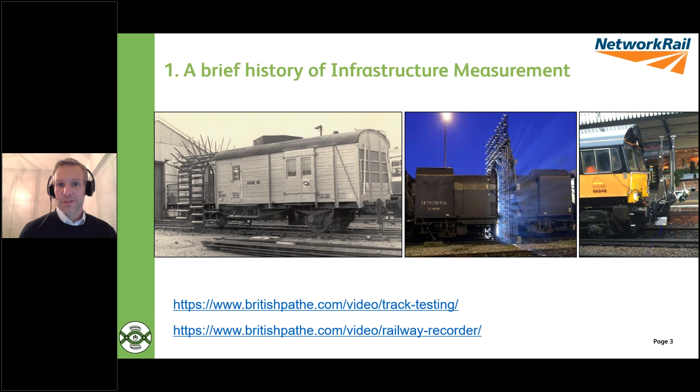So my experience, as Andy said, started in the rail industry in September 2000, and shortly after that, something unfortunate happened that obviously changed the way that we maintain and measure our infrastructure. It's the accident at Hatfield, 17th of October 2000. Unfortunately, 4 people lost their lives. A rail break caused a high-speed train to derail at, I think, more than 100 miles an hour.

Rolling contact fatigue was identified as the cause of the rail break. So effectively, surface cracking in the rail being left untreated and propagating down into the head of the rail, and as you can see by the picture, caused the rail to shatter into loads of pieces. And as I mentioned, 4 people lost their lives in that accident. That was very early on in my career, 6 weeks in.

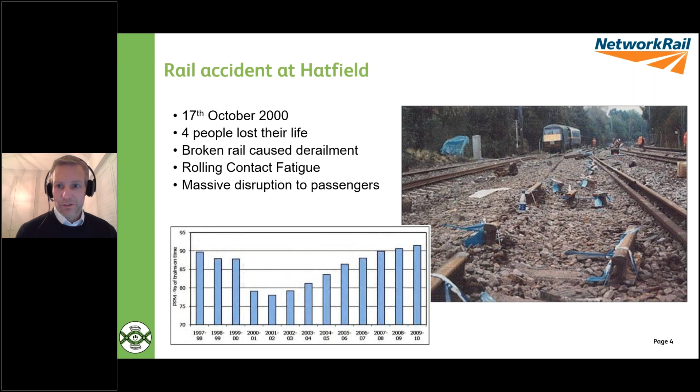There was massive disruption to passengers, as the graph there shows, PPM down to 75, 76%, huge disruptions, huge delays. And what I'm going to talk about in the next few slides is really as a result of this. There was huge investment in infrastructure measurement, both technology and trains, and I'm going to describe some of that.

So the first thing that came out of that was a real look at our rail testing and rail management regime, with the introduction of the ultrasonic test units, which, as I'm sure most of you are aware, run around our network using ultrasonic probes to test our rails, to identify internal defects within the rail.

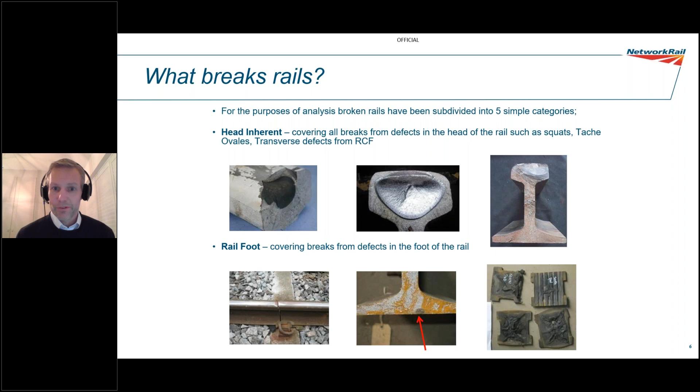Just as a bit of an overview of some of the types of defects that these systems detect, broadly broken down into 5 different categories. So head defects, which is sort of the images on the top, rail foot defects, which are proving to be difficult to find, and as you'll see a bit later, making up a larger and larger proportion of the number of rail breaks that we have per year now. Also weld defects, so faulty welds, again, the numbers here have reduced drastically, and there's also bolt hole breaks from star cracks at bolted joints.

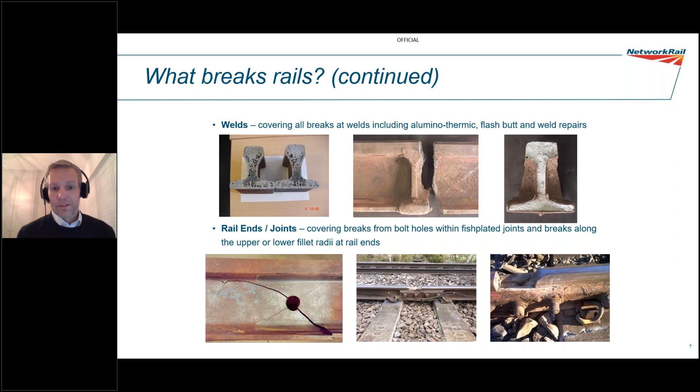I guess the other thing to consider is the backdrop of that is that over that time period, traffic has probably gone up by around 50%, and access to the railway to actually perform maintenance has reduced drastically, so much less access to actually get in and intervene. So obviously the UTUs were not entirely responsible for all of that improvement, but they were a very large part of that. So obviously some good coming of the catastrophic events at Hatfield.

I mentioned earlier about different types of defects. So just a bit of an analysis here around the types of defects that were prevalent in 2010, 2011, which is the pie chart at the top. So 30% weld defects, 16% rail ends, 40% rail foot. 5 or 6 years later, weld defects halved, rail end defects halved as well in terms of percentages, and rail foot defects making up a much greater percentage of the total number of breaks.

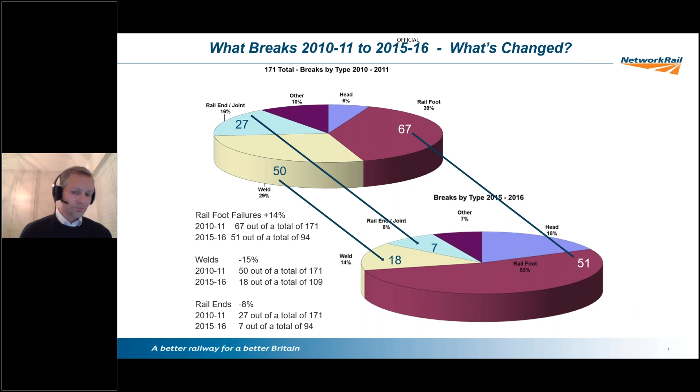In addition, so I joined Network Rail in 2006, and there was a huge amount of investment going on in the measurement train fleet at that point. So as well as the ultrasonic test trains measuring the rails, there was also rail profile equipment fitted so that we can measure side wear, head wear. There's ground penetrating radar fitted. That was one of the first projects I worked on at Network Rail, bringing that technology in. I'm just going to say a little bit more about that.

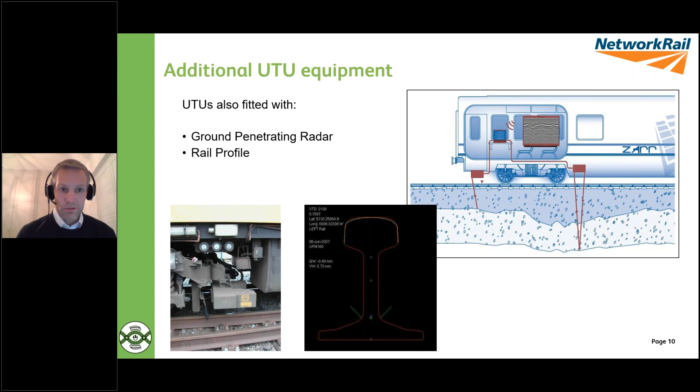So yeah, we fit the first batch of GPR equipment in 2006, trying to understand track bed condition, trying to understand whether we could identify the early onset of wet beds, whether we could do more to determine where renewals were required versus where maintenance would work. And these pictures on the slide here just show the GPR antenna fitted onto the measurement trains. It's the black box that you can see there, hopefully that's popping up on the screen, and the white box on the image on the right that houses the antenna.

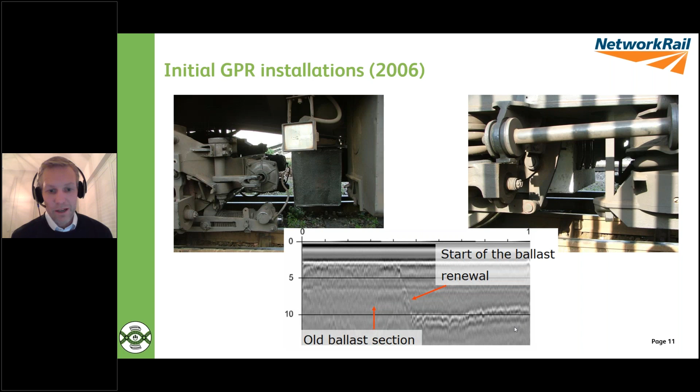So this was quite a useful introduction, and in fact so useful that in 2009 we actually upgraded the equipment. So we fitted some effectively higher resolution antenna, 2 gigahertz antennas, so that we could really get a detailed look at the ballast condition itself, and look at the fouling levels within the ballast.

So Andy mentioned new measurement train. I worked on the geometry system that was fitted to that vehicle whilst I was at AEA and tested it. Came into service in 2003. And yeah, it's still, almost 20 years on, still the flagship of the measurement fleet. Probably could do with a new name, not so new anymore. But yeah, it's running around our mainline track.

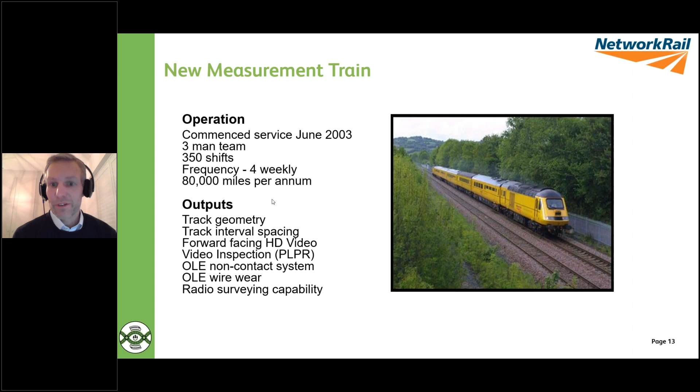It's recording track geometry. It's recording track intervals, separation between tracks. It's got plain line pattern recognition, video inspection equipment fitted to it, high definition cameras, and there's also overhead line equipment fitted, so non-contact overhead line measuring wire heights and staggers, and also wire wear. So it's a bit of a Swiss Army knife of measurement trains. I think the only thing it doesn't do is the ultrasonic testing, and that's just due to the fact that the equipment doesn't operate at the speed that this train runs at.

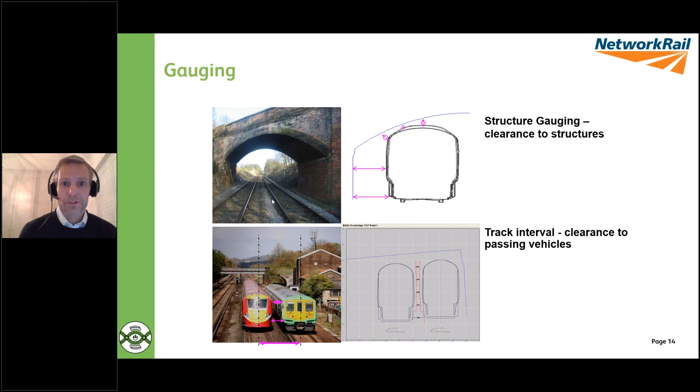I've mentioned gauging a few times, so it's kind of a key thing that the fleet does. So making sure that vehicles fit through the sort of structures that are around our network, and also making sure that they can pass each other safely. So tracks are far enough apart from each other. Again, this is another area that I've worked in quite extensively over the years.

So this is the black optical car on the first slide as I started. This again was a project that I started working on soon after joining Network Rail, basically to move away from the white light measurement system, which had, as well as the high temperature that the lights caused within the actual vehicle, some reliability issues. There were some data accuracy issues. So this was our first step into using lasers for structure gauging. So we fitted the laser flex system.

Basically, it very quickly became known as the dustbin that was fitted to the vehicle. So it had a similar principle to the white light system that I mentioned. So it's shining laser lights out perpendicular to the track, and cameras looking back towards those laser lights to establish how far away from the system the structures were. And just a picture there showing the red laser lights coming out of the system when we were doing some testing.

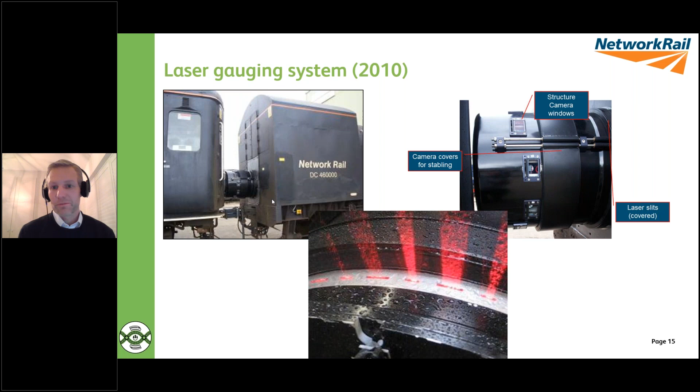Finally, I think in this section is Mentor. So Mentor is the oldest measurement train in our fleet. I think it's 60-something years old now, and it's overhead line measurement. It's a contact system, so it has an instrumented pantograph fitted to it that measures the force between the wire and the pantograph. It also measures the dynamic height and stagger of the wire, and also the acceleration. So it's giving you all the information you need to understand what the pantographs on passenger trains are experiencing as they're traveling around our network.

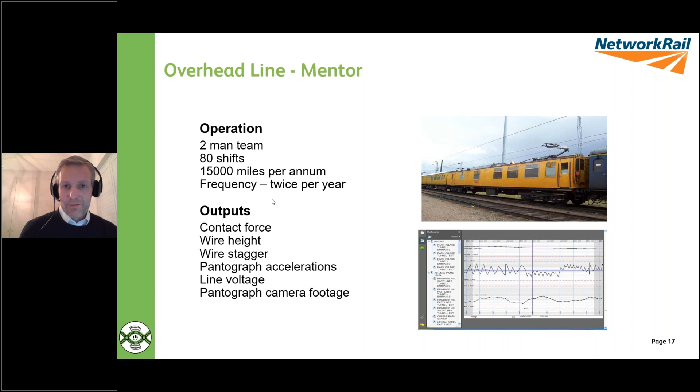It's limited to 100 miles an hour, so a bit more on why that's an issue for us later on. But we've recently upgraded the equipment on the train. There's another story about infrastructure measurement. The picture here on the left is the previous instrumented pantograph that was fitted to Mentor. It was unfortunately involved in a dewirement in August 2012. So we'd just had a new system fitted.

We were just commissioning it, just getting it into working order, and it came along and went through a section of track that had recently been maintained. The registration arm had been left in the wrong position. Mentor came through, hit the registration arm, massive flashover, bent the pantograph arm into the shape you see there, and fried all the measurement equipment. So that was a particular own goal for us.

But pleased to say that the picture on the right is now Mentor reinstated. That was taken at Old Dalby, testing that was carried out at the back end of 2019 to commission the new system, and it's now out and about collecting force and acceleration, heights and stagger data. So we managed to rescue that, thankfully.

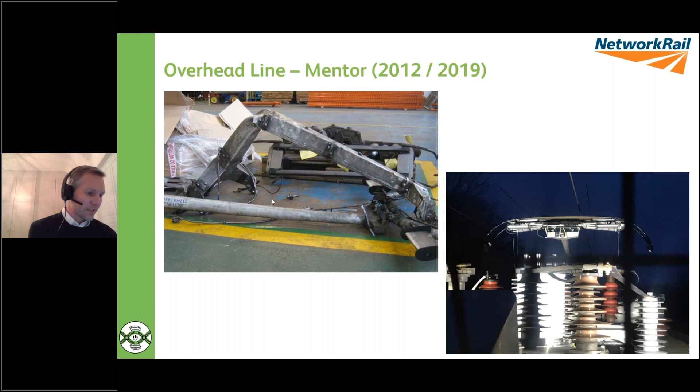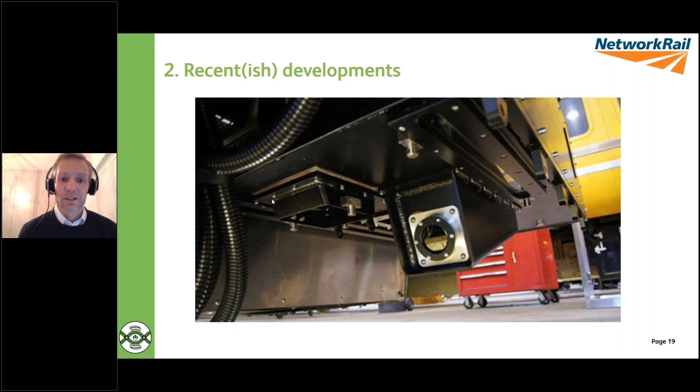So I'm going to cover some of the more recent developments in this area. I say recent-ish. Some of them not that recent, but they've still made quite a fundamental change to our measurement fleet and the way it operates. The main change since probably 2010 has been the introduction of plain line pattern recognition, which I'm sure most of you have heard about and probably know a bit about.

Effectively, it's a video inspection system. It's targeted at reducing the amount of visual inspection that's required of the track. Obviously huge safety benefits, and it also gives the ability to look at trends and how things are changing over time. So rather than it being a one-off inspection, you can look at faults over time and the numbers and how they're changing.

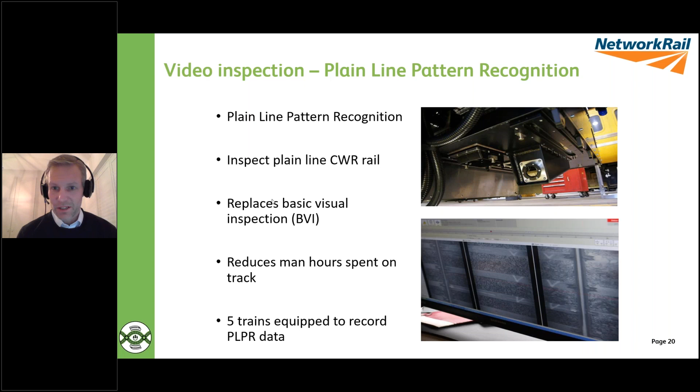It's based on a line scan camera system. As the picture shows here, there are 7 cameras fitted underneath the train, 3 looking at each rail and 1 looking at the four-foot. There are also laser scanners to build up 3D pictures and 3D representations of key areas, particularly around the fasteners.

There are also ballast shoulder lasers that are there to detect ballast shoulder levels and also the level of the ballast within the crib, so that they can be reported if there's insufficient ballast and potentially a buckling risk. And, although from a separate system, track geometry information is a key feed into the PLPR collection process.

So as I say, this is a measurement train borne system. In addition to NMT, there are 4 other vehicles, and they operate on a 4-weekly cycle around the plain line sections of the network. The process is that the data is collected on the trains. The on-train technicians ensure that the data is collected and recorded onto removable hard drives.

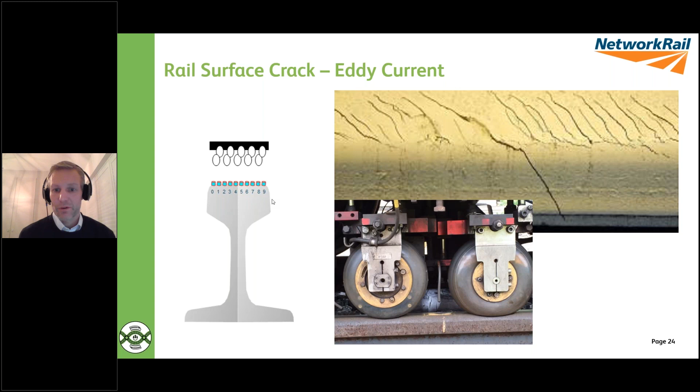So this next slide, which I've stolen from Brian, is just a very simple description as to how the equipment works. There's a coil which has a current passed through it, which induces an eddy current in the surface of the metal. And then if there's any flaw or crack within the rail surface, that will affect the eddy current, and the effect can be measured. So if I just get back to the previous slide, there's 10 probes across the head of the rail. So each one of those probes is effectively doing this and identifying within its sphere of measurement whether there's anything that's affecting the eddy current.

I think the big step forward with train-borne eddy current testing compared to the previous manual process is that the output is the depth. So it's the depth of the cracking, whereas the manual process was measuring the longest crack within a given section of rail. So it's really the depth that you're interested in to give you the risk of an internal defect developing.

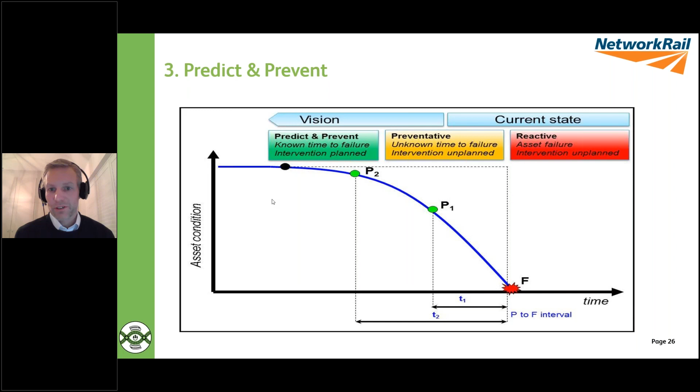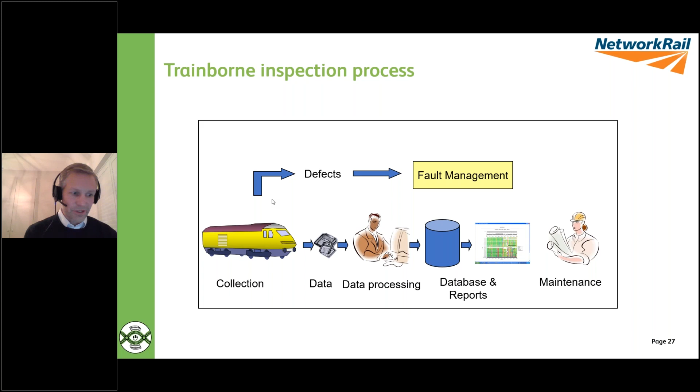So when I move on to intelligent infrastructure, there's more of a description on how we're trying to get away from that, how we're trying to do things more intelligently. I think the main point of this slide though really is that it's still quite reactive in terms of the process that it drives. And reactive maintenance is a problem for us really, because it's quite inefficient. Our access is reduced hugely, so being able to work in a reactive way is difficult.

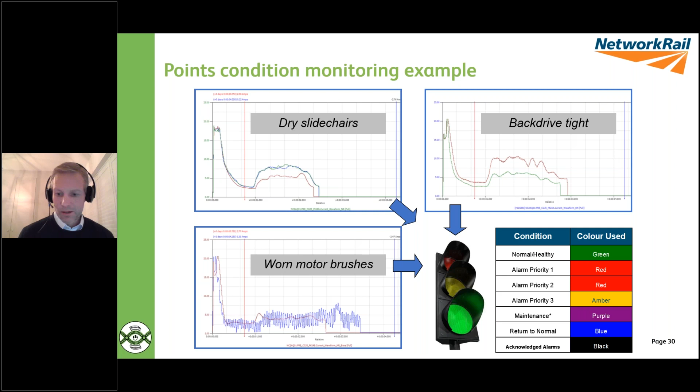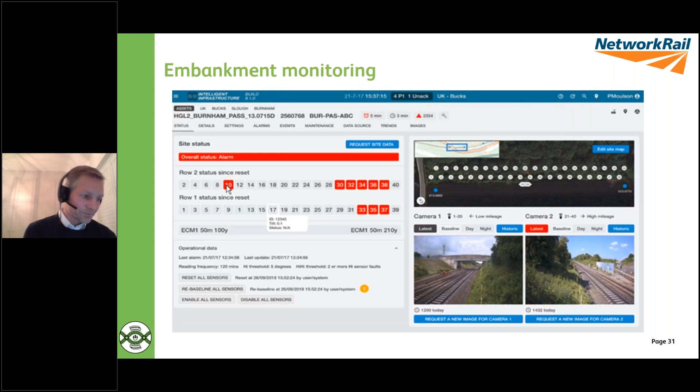That's something that's been a long time in coming. It's something that will definitely help with the more monitoring approach to linear assets that's been adopted with the embedded monitoring program. So more regular data, looking at trends, looking at changes over time, and predicting when it is you need to go and intervene.

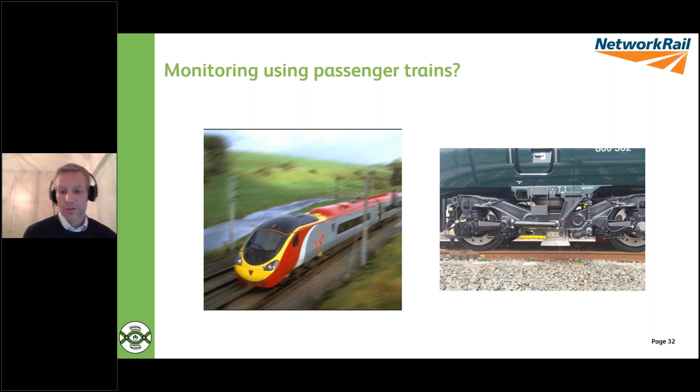So we're in the process of selectively deploying overhead line equipment onto passenger trains. One on West Coast Main Line, Great Western Main Line, East Coast Main Line, and also talking about East Midlands. So that's going to be more regular data, again, predictive. It opens the door to predictive capabilities that we can develop, which brings me neatly on to the Intelligent Infrastructure Program and our plans for exploiting all of the data that we're collecting.

And apologies for the change in the transition there between the slides. I just ran out of time to go through and change the formatting of slides and the transition points. But I thought the other way of looking at it was at least it shows that these aren't my slides, so a bit of a reminder to credit the Intelligent Infrastructure for these slides.

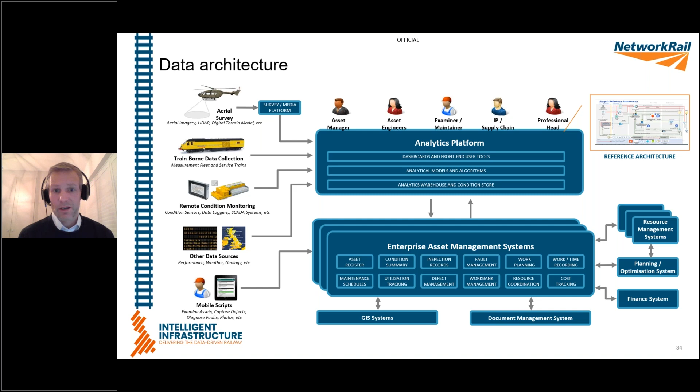And the next slide is a similarly high-level view on an end-to-end process for collecting data, validating it, mapping it, comparing run on run, so that we can look for changes, bringing it together with the relevant data that are useful to give an overall picture as to how the asset's performing, when the treatment might be required and what treatment might be the best treatment.

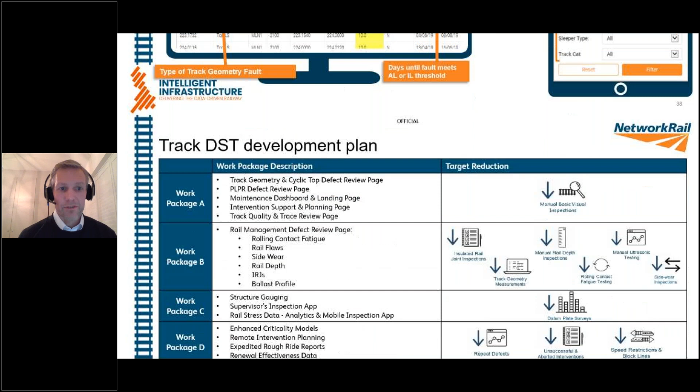So that's just for track geometry, but the plans are to build similar capability looking at rolling contact fatigue, or eddy current surface cracks, rail flaws from the ultrasonic systems, rail wear from rail profile, rail depth, ballast information from GPR. All of the data streams that I've mentioned already in the presentation are going down that route with decision support tools, predicted rates of deterioration, and looking to use that to become less reactive.

I think one other thing just worth quickly touching on is criticality of the system, the railway system. So trying to understand what the impact on the timetable is. So it's not just this piece of railway is predicted to fail soonest, so let's go out and fix it. If that particular piece of railway has one train a day versus another piece of track that has 100 trains a day, you need to be going to the right place.

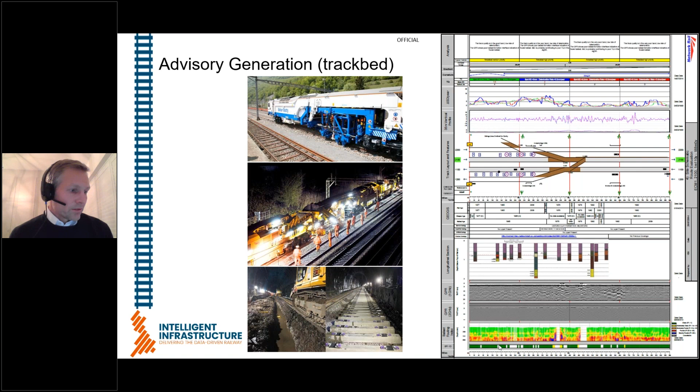So I'm just going to finish off by quickly going through some of the R&D priorities. In CP6 there's a huge R&D portfolio within Network Rail. It's been restructured slightly, looking across different sectors, different priority areas. So ease of use for passengers, emissions, optimized train operations. Probably the main two that I get involved with are reliable and easy to maintain, and data enabled, with data enabled being the thing I get most involved with.

So I'm just going to touch on a few of the projects that are going on within the area of infrastructure measurement. Within track maintenance and plant, there's a whole load of initiatives to do with components, future S&C, future track, cast crossings. But there's also a lot to do with monitoring. So there's robotic inspection and maintenance vehicles, a piece of work looking at whether we can build a rail test vehicle and also a vehicle that can do a weld repair of squats.

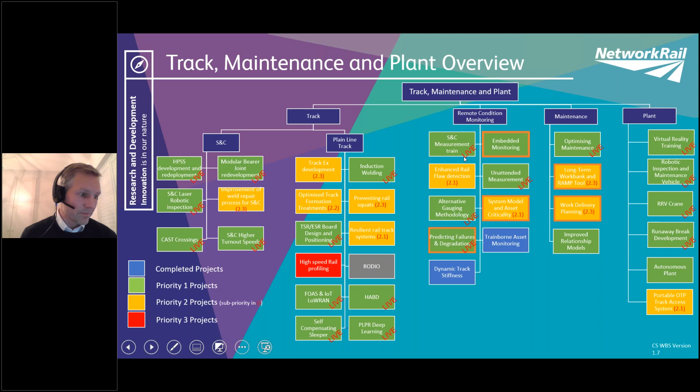So that's probably a couple of orders of magnitude better than the location systems we're using at the moment. So that could be potentially a game changer in terms of bringing together the different data sets more easily, rather than having to do a whole load of processing on that.

There's S&C inspection, so both from a robotic point of view, a piece of work looking at measuring the profile, measuring the clearances, contact angles and things like that, using the Felix robotics solution. And there's also a piece of work that's just started where we're looking at a kind of a train-borne version of S&C inspection. So building on track geometry, building on the work done with the MPV to measure track geometry in stations, looking at vision, looking at the profiling, similar to the way that the Felix system is being used.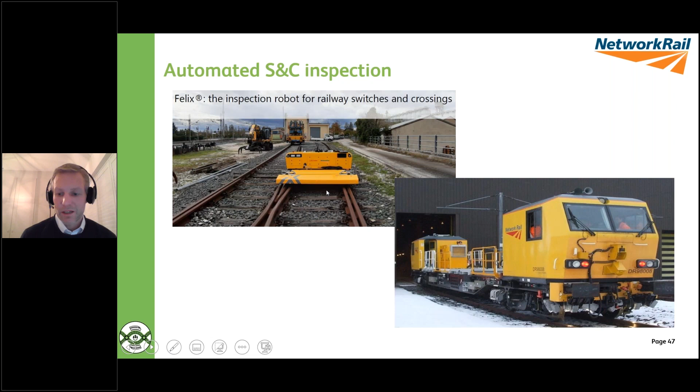I mentioned enhanced rail flaw. So although the UTUs have been incredibly successful and useful, there's still big opportunities to improve things. So combining the outputs with images of the rail is something that's really useful. Helps to try to reduce false positives. We want to try to move towards a place where we can reduce the amount of manual verification required, because we can do some more intelligent analysis and reduce false positives before data is issued.

So I've mentioned before, access is reduced, so that's another driver for reducing verification. We want to try to increase the speed at which we can record. So running around at 30 miles an hour, whilst key critical activity from a safety point of view, is not very conducive to running freight trains at 60 or 75. And also running 30 miles an hour at night gets in the way of possessions. So those two things conflict with each other.

And the other part is detecting types of faults that currently aren't detected very well. So vertical splits in pre-76 rail, and also foot defects is something I mentioned. So a greater proportion of rail breaks are from foot defects. So that's something that we need to be looking at in this R&D project.

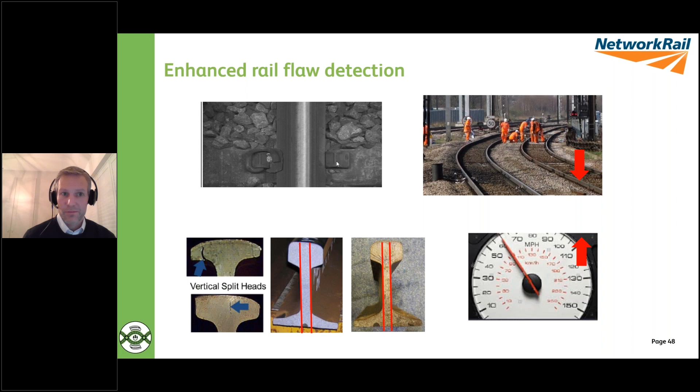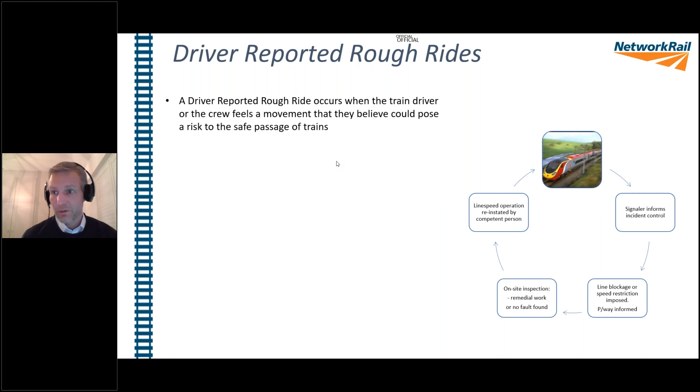Driver reported rough rides is another piece of work where we're trying to reduce the impact of drivers reporting rough rides. So trying to understand where rough rides are likely to be reported due to vehicle response monitoring, looking at whether we can do some sort of simulation work to understand what a safe speed might be if a rough ride is reported. So we've been doing some work with ProRail in the Netherlands about that. Some system that they use where they can say actually 80 kilometers an hour is a safe speed for this type of vehicle, rather than a standard 5 or 10 mile an hour caution.

General assumption is there's something wrong with the track when there's a rough ride. So again, if we've got monitoring equipment fitted to trains, we can identify sometimes it might be a combination: poorly set up vehicle, poor piece of track. Just backed up by some numbers from some 2018 data that we looked at, where 68% was no fault found when rough rides were reported. So part of that might have been locational accuracy, part of that might have been because it might have been a combination of vehicle and track and difficult to find.

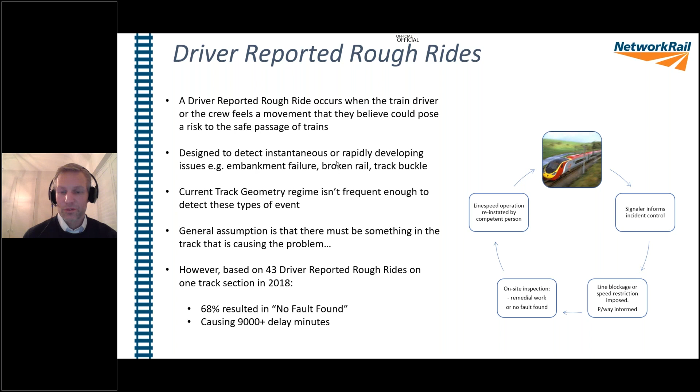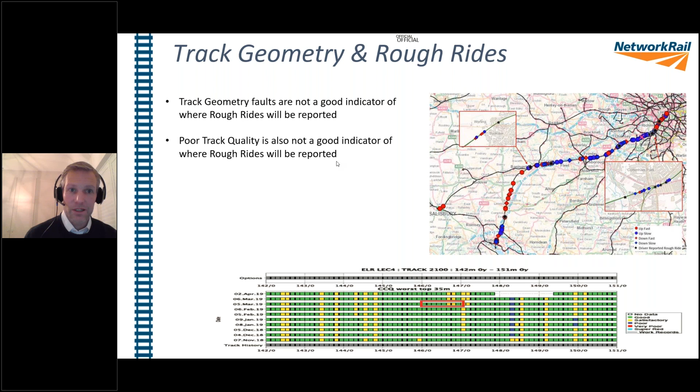So the work we've done so far shows that geometry on its own is not a good indicator of rough rides. It just shows there a good section of track, but rough ride reported there. So it's backing up that work that we're currently carrying out, where we're introducing a number of different monitoring systems onto a fleet, and we're going to be looking at the number of potential rough rides that those systems predict there will be, and then correlating it with the number that actually do occur, and looking at whether we can improve the process and reduce the impact of service affecting failures caused by rough rides.

So also within R&D, probably the other key work stream I'm involved with is reliable and sustainable power, so primarily overhead line and conductor rail. So this is a piece of work that Wales and Western are leading on, which I was involved in the early stages of, but it's got huge potential, which effectively is using the pantograph camera to look and identify the wire height, the wire stagger, and estimate the force between the wire and the pantograph.

So potentially all new vehicles that come equipped with pantograph cameras become monitoring vehicles. So you get huge volume of data, huge ability to monitor change over time, and also ability to spot things that have changed quickly. So you can potentially prevent incidents, and as everyone knows, this sort of overhead line incident has caused huge delays and huge impact and huge cost.

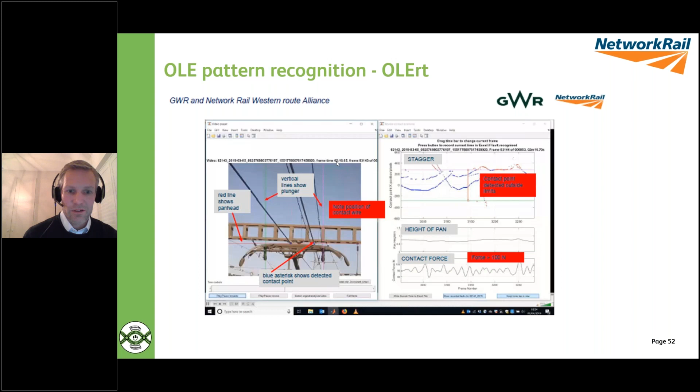So again, bringing together different sources of information, verifying measurement data with video data is a key area of focus. Other things we've been doing with conductor rail: we're currently working on the replacement system for measuring conductor rail profile and wear, but also position relative to running rails. Looking also at the impact between the conductor rail and the shoe, so some sort of force measurement, and also we've carried out some thermal imaging trials to look for hotspots.

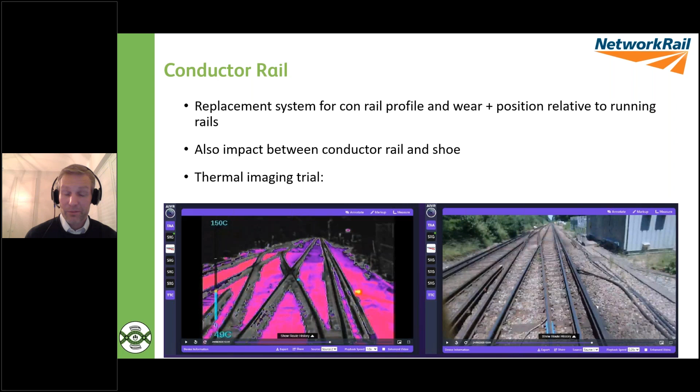So this particular cable coming in here, there's a hotspot been detected. Again, we've used portable cameras fitted on the front of passenger carrying trains for doing this work. And I think that's it. So thank you very much for listening, and happy to take the questions.

I'm muted. Is Andy there? He fell asleep. I doubt it. Yeah, I hear some rumblings. Obviously got his microphone muted. Right, sorry about that. I couldn't unmute myself for some reason. Can you hear me now? Yes, we can hear you now, Andy. Right. Thank you. Take over. Okay, yeah, so sorry about that.

Right, so we have got a couple of questions come in. So Andrew Wilson actually poses quite an interesting one about how the structure of this is working. He's asking, with predictive work from decision support tools, who has the ultimate responsibility for safety of the line? And how are we going to actually support people with that kind of information? So things like lowering the speed, how do we actually support people doing that?